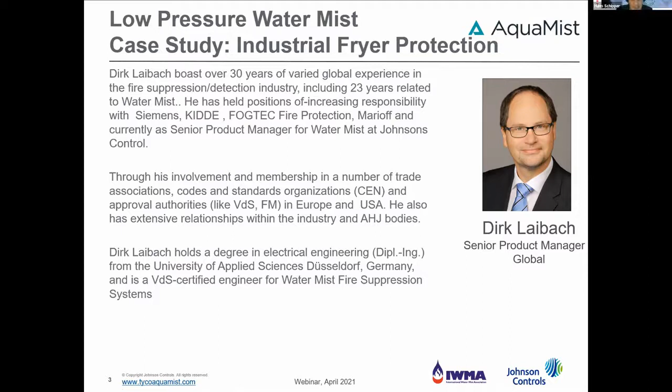This afternoon's introduction is to low pressure water mist systems for industrial fire protection. Here's an overview of the topics I would like to discuss during this presentation.

First of all, I would guide you through some key notes of the typical characteristics of low pressure water mist systems as they are for these specific applications, open deluge systems. Next, we'll go through the typical highlights of what a fryer is, what elements these fryers contain, and what specific parts we are protecting on these industrial fryers.

I will guide you through the typical approval testing program as we have done according to the FM 5560 fire test protocol, and I will take you into a specific project application which we have done with one of our partners in industrial fire protection projects.

Also, we'll highlight the system approved components. As already mentioned, the basis is NFPA 750 for all these water mist systems, but they refer to approved or listed components used in your specific projects or systems protecting, in this situation, industrial fryers with water mist systems.

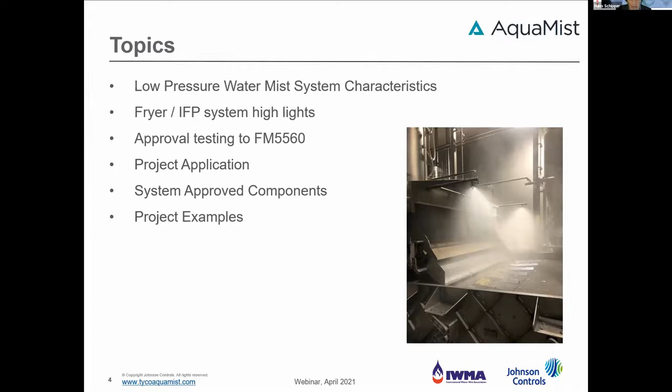Next, I will show you a bit of progress we made on a couple of projects, some site pictures of the actual fryers. The picture you can see here is the first one I want to show you, basically a takeout area. I'll move to the next slide where I'll explain a bit about the characteristics of these low pressure water mist systems, specifically for industrial fire protection systems.

The objective for these systems is typically the extinguishment of fires. As mentioned before, these are all open deluge systems, specifically for class K fires, the so-called cooking oils as defined in NFPA 750. One objective is flame cooling and oxygen displacement in order to extinguish the fire, as well as radiant heat blocking in order to cool down the periphery of the fryer itself.

All these systems are based on fire testing to FM 5560 and can be found in detail in our DIOM, the DIOM TFP 2240, specifically for industrial fryers.

The nozzle is actually the main part of these systems, a specifically developed nozzle we call the AM31, which has a minimum design pressure of 11.7 bar, resulting in a flow of roughly 14 liters per minute per nozzle. The overall average system demand flow for typical fryers, as we've seen in real life, is somewhere between 200 and 600 liters per minute as a total system demand flow.

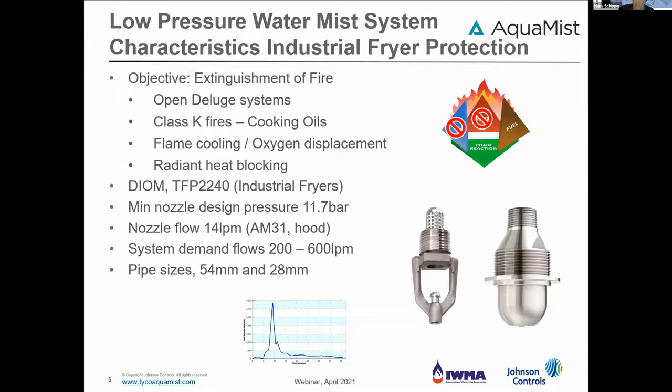Next, I'd like to give you a bit more idea of what an open deluge system is, and what 14 liters per minute looks like. It's based on fire testing to FM 5560. We at Johnson Controls developed a specific nozzle, as you can see here on the top right, with a unique spray pattern. I want to show you the discharge of these nozzles.

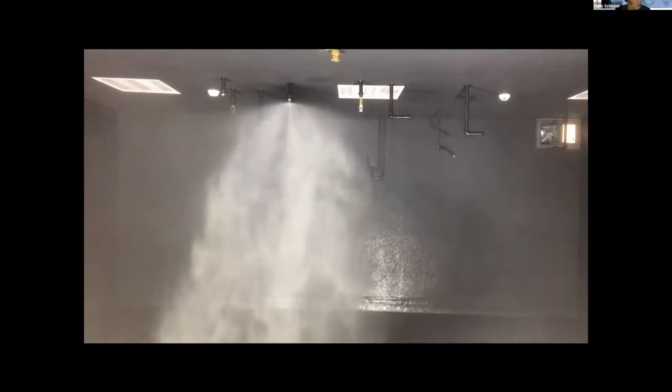So this is really 14 liters per minute with an average droplet size of 150 to 200 microns.

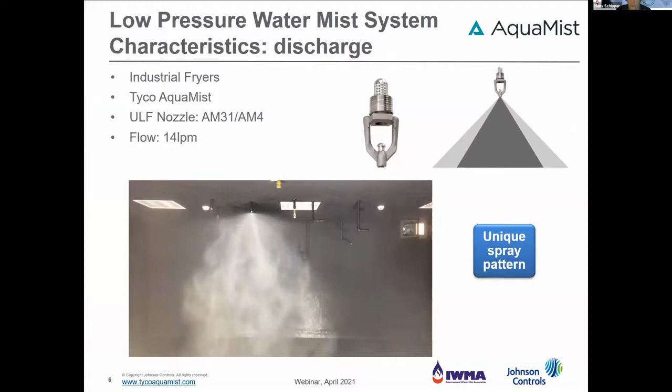Moving on, so what is an actual industrial fryer? I want to highlight a couple of main areas that we are protecting with our AquaMist ULF systems. These industrial fryers are mainly large cookers of food products installed in industrial environments.

For all these fryers, oils are mostly used as the cooking medium, and you can have oil fryers up to 19,000 liters of oil in the actual pan. The 4 main areas we typically see in those cookers are the primary cooking area, a takeout area, a fines box, and exhaust stacks.

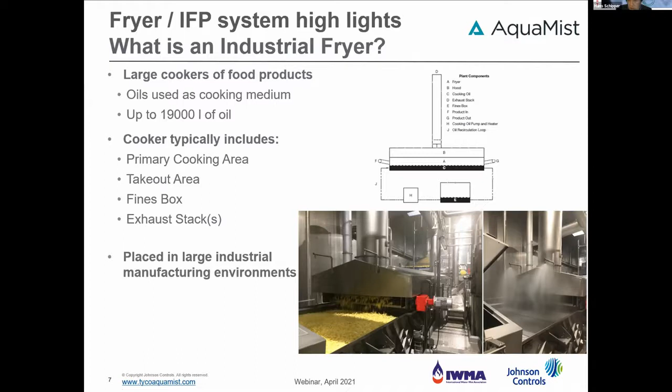On the next slide, I will highlight where we find these main 4 areas to protect. The primary cooking area is actually the area where you will have your oil pan with the oil level as well as the hood. This is the primary cooking area as described in the FM 5560 test protocol.

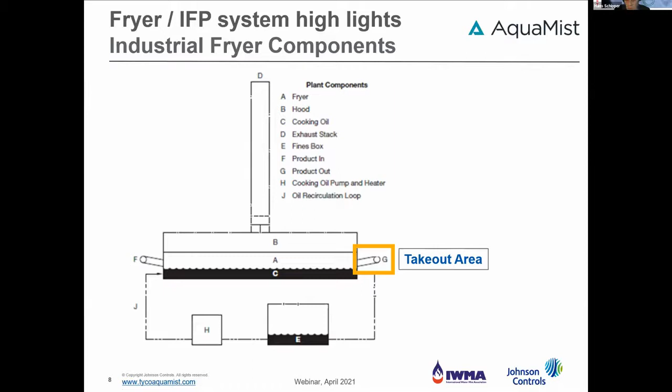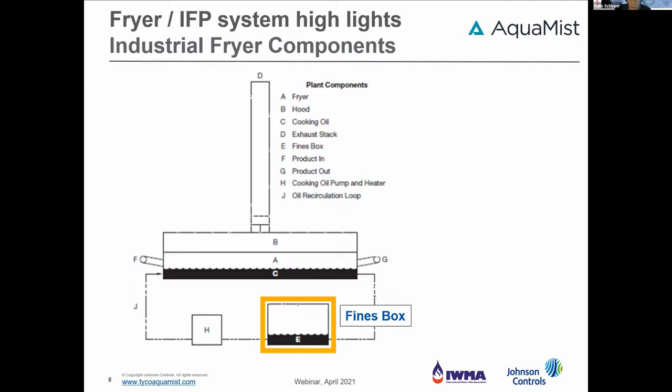Next of the main areas that need protection is the take-out area, that's where the product comes out of the oil cooker. A fines box, more or less, is the oil filter used to filter your oil through the cooking process. Lastly, we have the exhaust stacks, where you have the exhaust of your cooking vapors. Those are the main 4 areas that we can protect with our AquaMist ULF systems.

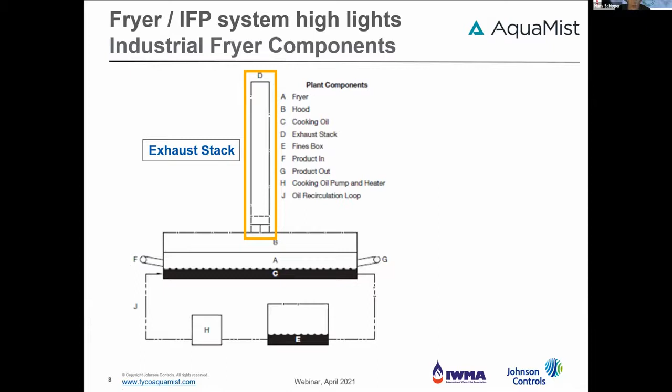Going into the actual fire testing to FM 5560, these tests are done to Appendix J, fire tests for water mist systems for the protection of industrial oil cookers. To give a quick overview of the tests, based on the actual test protocol, it is the idea to have 3 different mockups.

Mock-up A is a large pan of 2.4 by 2.4 meters as a mock-up for an oil fryer. Mock-up B is a pan 2.4 meters wide and 4.8 meters long, and mock-up C is 2.4 meters by 7.2 meters long.

These three different mock-ups you have to do the actual fire tests on, but in total a series of 6 fire tests has to be done, meaning each mock-up has to be tested in a situation with the hood position up as well as the hood position down. So for all 3 mock-ups, tests have to be done for a hood up position as well as for a hood down position.

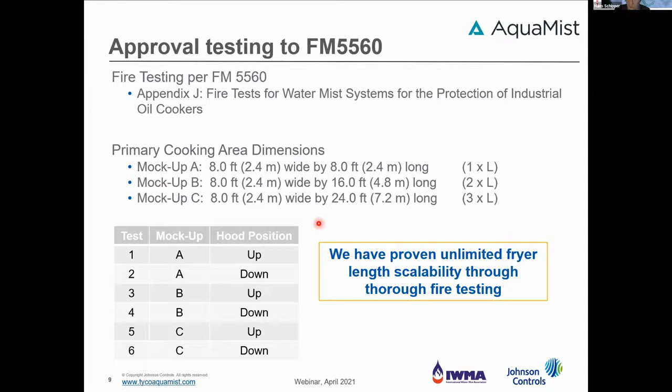A couple of fire test approval criteria as written down in the FM 5560 test protocol: all these tests are based on auto ignition temperatures of the oil. Fires inside the cooker mock-up should be extinguished regardless of the position of the hood, in the up position or in the down position.

Next of the fire test approval criteria is the need to extinguish all open flames within 1 minute after a system discharge. One of the other criteria is that it's not only extinguishing these fires, but you also have to prove that you can cool down the oil temperatures within 2 minutes below its oil flash point.

As already mentioned before, duration shall be a minimum of 10 minutes, and at the end you should really be able to extinguish fires and have no excessive fire flare-ups or micro explosions after a while.

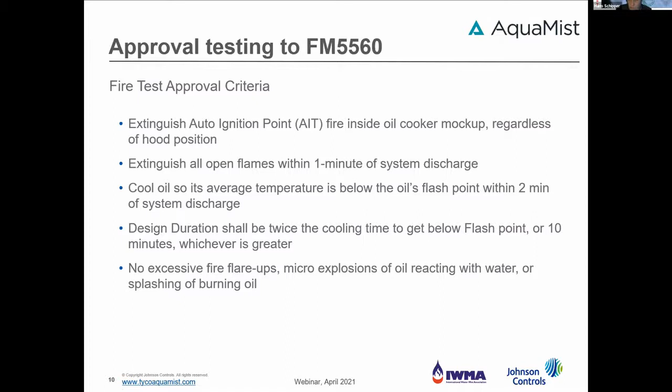Based on the FM 5560 test protocol, we have done more than 50 full-scale fire tests at our test facility in the US, where we have had 14 tests witnessed by FM Global.

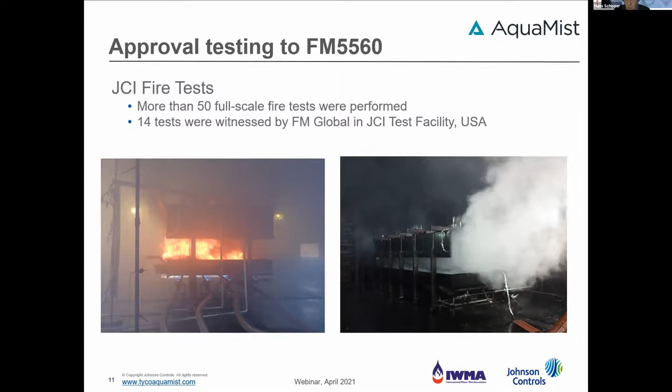So, to give a short overview, what is actually done during tests? Just to give you an overview of an actual test we have done, so what you see here - and I will show this movie twice.

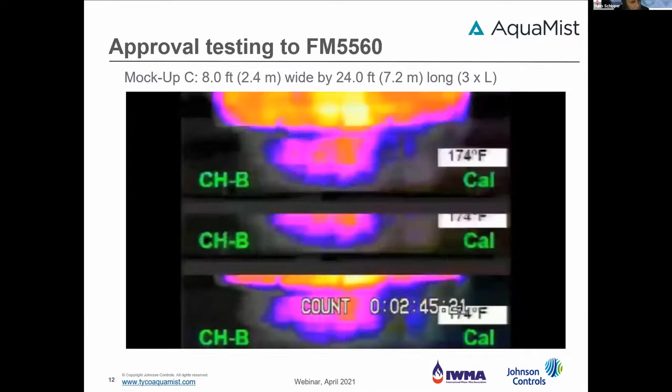What you see, all orange and red, are high temperatures in order to extinguish the flames and to cool down the actual temperatures.

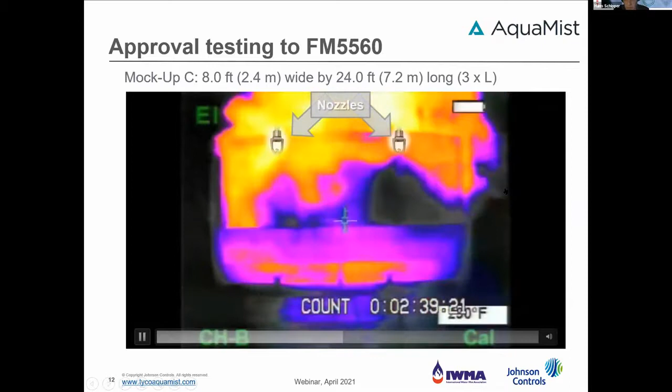The setup was the mock-up with 2 nozzles, so 2 rows of nozzles with a pre-burn time of 30 seconds, discharging water and extinguishing the fire within 10-20 seconds. It's important to have an even longer discharge time in order to cool down the oil temperatures below its flash point, as well as the fryer itself, so the complete fryer will be cooled down.

Additionally, I would point out that you can see in this heat radiation picture very well the temperature of the water, which is black - about 20 degrees. And already within this 1 minute, the fire has been extinguished.

Nearly the whole surrounding of that fryer, meaning the metal, has been cooled down very effectively in only 1 minute. What you mainly see is the heat remaining in the oil, which is the yellow shadowed part of that photo or film. That's really amazing what water mist can take out and cool down in this surrounding. You can achieve tremendous cooling capabilities using water mist.

Which again is amazing—you can see the water does not really impinge below the oil surface. Normally, when you pour a glass of water into oil, it will explode. But due to the fine droplets, evaporation in the oil does not take place, as the small droplets remain on the surface and do not dig into the oil itself. So this explosion will not take place with water mist.

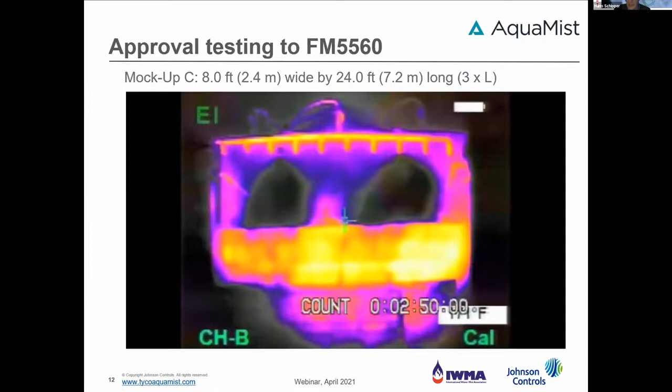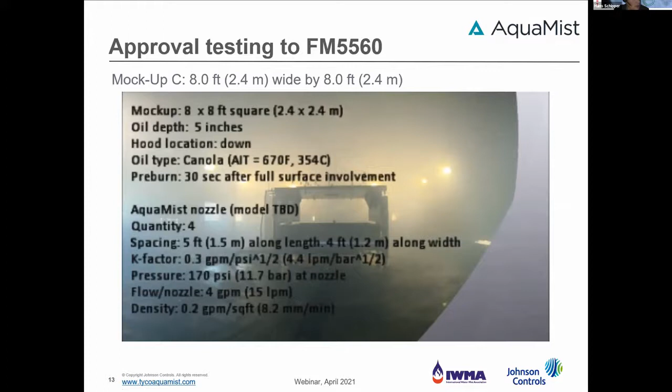So the next slide, I would like to show you how these tests actually proceeded. This is also a fryer up to 2.4 meters wide with 2 rows of nozzles—this is the smaller one, so in total 4 nozzles. That's roughly 50 to 60 liters per minute total.

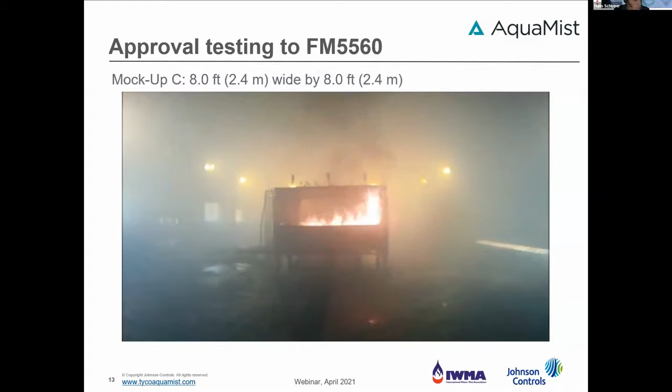Here you see the actual heaters, and now already some flames come up. The auto ignition temperature of the oil is reached already, and flames will be detected due to heat detectors. There is a pre-burn time of 30 seconds before discharge. So pretty big flames already coming up.

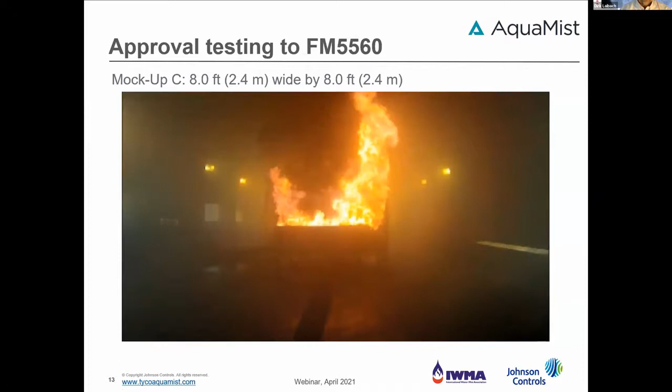We need to point out this pre-burn time, which is given by FM 5560. It should bring the system onto a very safe side, because in the real world the heat detector has already detected the relevant heat level quite a long time before, meaning in a real life case the water mist system has been activated far before the 30 seconds. And what you see after discharge, really 10 to 20 seconds, the fire is extinguished, and overall what you see is just water vapor.

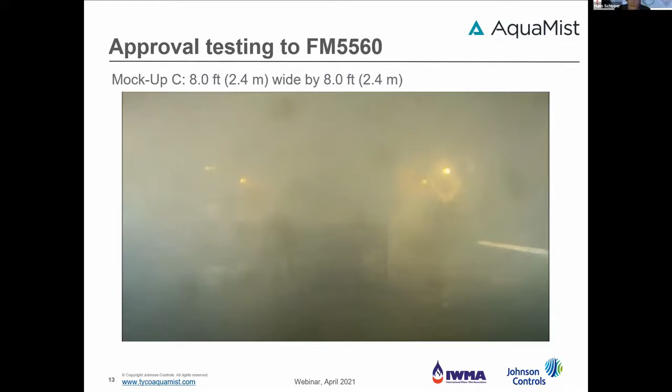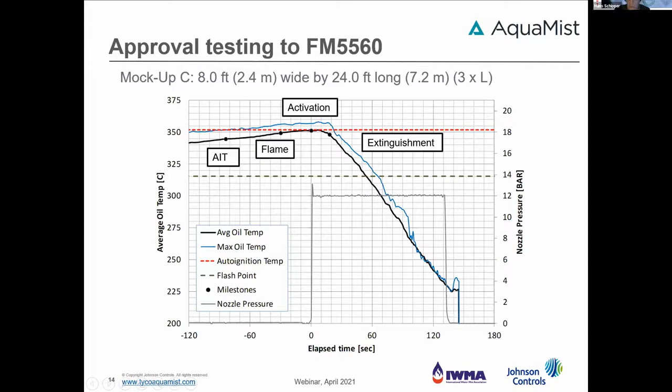This was designed and installed with a total of 26 nozzles, 2 rows of nozzles installed under the hood in your primary cooking area. These systems were designed with 2 zones per fryer: Zone 1 is the fryer itself with stacks as well as the exhaust and the takeout area, and a separate zone for the filter.

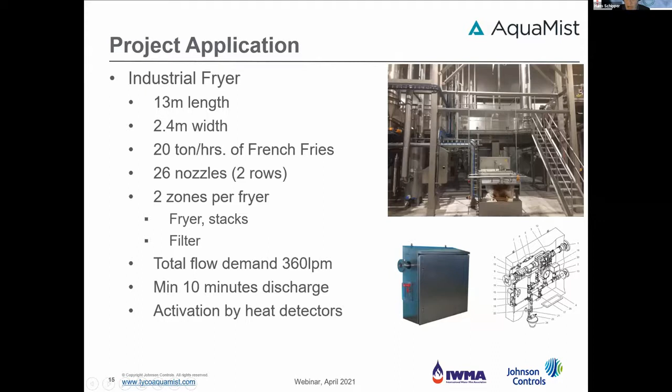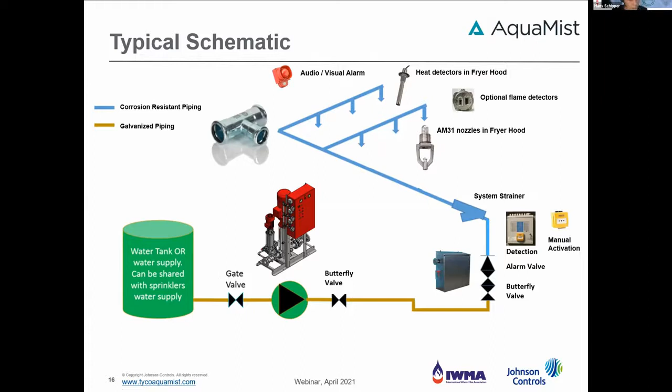As mentioned before, and as also mentioned by the previous speakers, it's all about a tested and approved system, but also about tested and approved components. The FM5560 protocol is not only about fire testing, but it's also about component testing.

So here's an overview of the main components used in these industrial fire protection systems: a pump unit, the approved nozzles, the piping system - the G-press stainless steel non-corrosion or corrosion-resistant piping systems - alarm valves, and the nozzles. These do hold a third-party approval, minimum the FM approval, but most of these components do hold UL listing and VdS approval as well.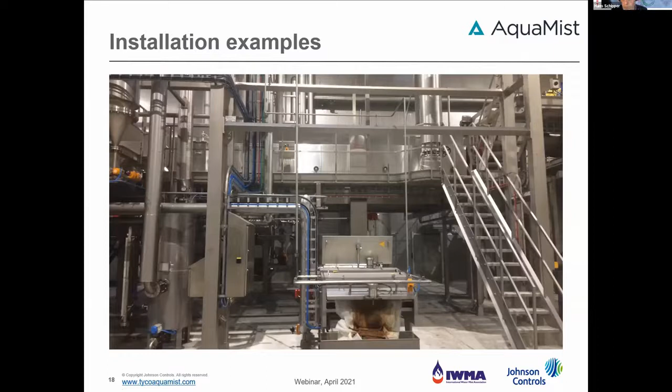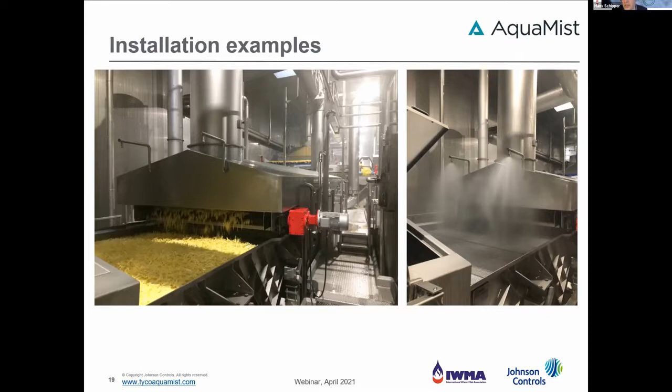So this is, as mentioned before, the take-out area, where the product, the fried French fries, come out of the industrial oil cooker, and there is additional protection required. Here you see a test during commissioning with actual fries, and here you see a cold discharge test of this installation.

In order to give you more detail on how these nozzles will discharge, here's another short movie. This is a cold discharge test during commissioning, just to give you a good overview - roughly 14 liters per minute per nozzle.

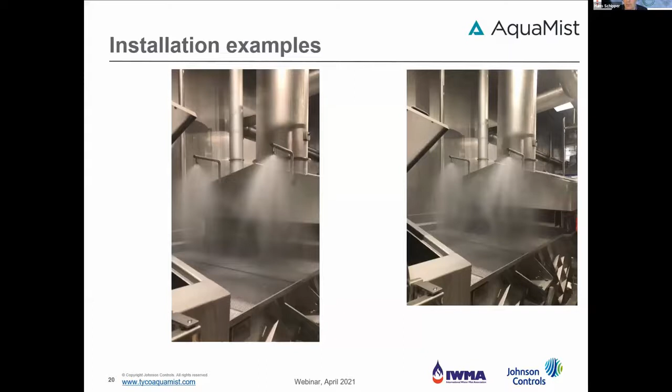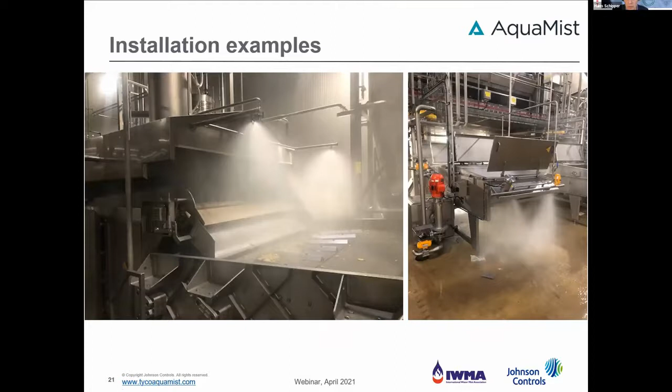Next slide. Again, here's a picture of the takeout area of one of the fryers. And here you see a cold discharge test for one of the filters, which I'll show you in a movie as well, to give you a good idea what these low pressure nozzles discharge - you can see 13, 14 liters per minute.

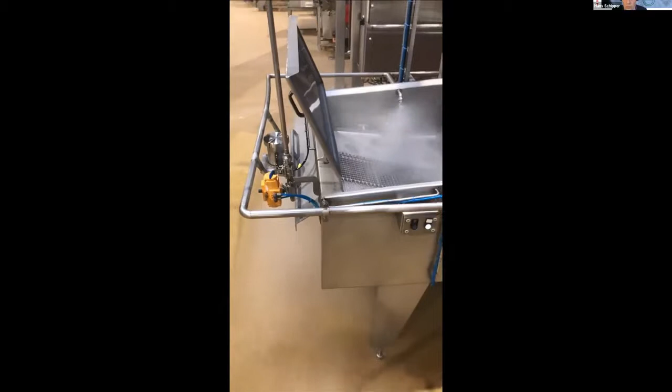Next slide. As I mentioned before, during testing you have to test with the hood up and the hood down. These fryers all have movable hoods, basically for maintenance reasons. But as you can see here on the left picture, you have your water inlet connected with a flexible hose, and you can imagine if the hood goes up and down, you have to have a flexible connection for your water supply.

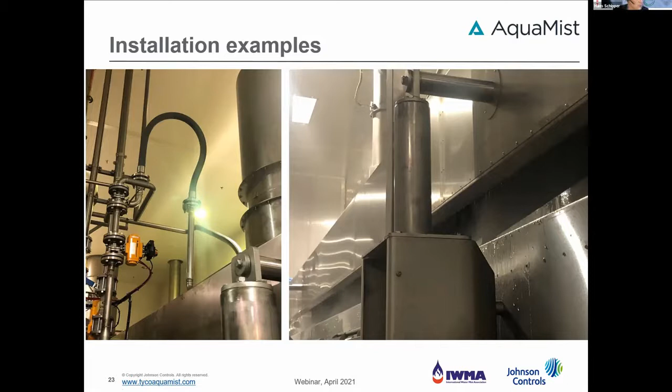One picture showing a total overview of one of the projects we've done - the so-called pump room. This is separated from the production area, where you have your water tank based on a minimum of 10 minutes discharge. In this project, we had two production lines, so 2 pump units and 2 valve stations per fryer line - 1 for zone 1, the actual fryer, and 1 for zone 2, the filters. That was all duplicated due to the reason that they had 2 separate production lines.

So one addition - Hans, maybe you can go back one slide. I think it's major important, as here, although this is a low pressure system, we do also like the high pressure or hybrid system. The piping is stainless steel, as you can see in that photo. And this is one of our key things we should point out with water mist systems in general - this is a long life technology.

Manufacturers and players in that field having approvals, as Mark mentioned already, use stainless steel piping, which is really a benefit for the customer, as this is a really long-lasting installation.

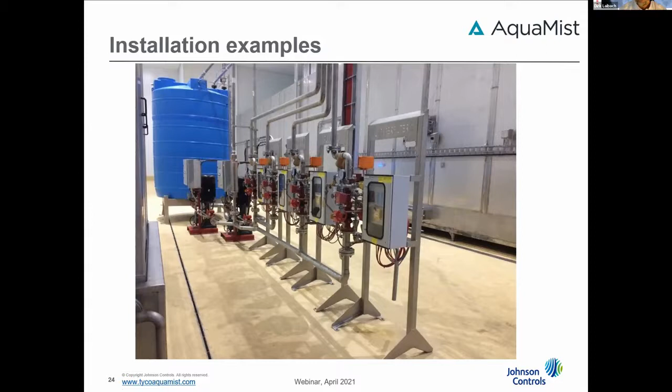So I just want to highlight that we discussed centrifugal pump units, but for these systems there is also an option for standalone systems in situations where power supply is not that reliable, and there a standalone system with nitrogen cylinders and a water tank can be an option for the smaller fryers as well.

That's quite similar to Anne's presentation for the cylinder system used for machinery spaces. It's more or less the same methodology. You have water cylinders or a water tank and a propellant, which Anne explained well, which pushes out the water to the nozzles. The difference is that water is not stored in high pressure cylinders, it can be stored in a low pressure tank. The difference is just the size and type of water storage, not more, not less. The principle of storing water for these standalone systems is exactly the same with high or low pressure systems.

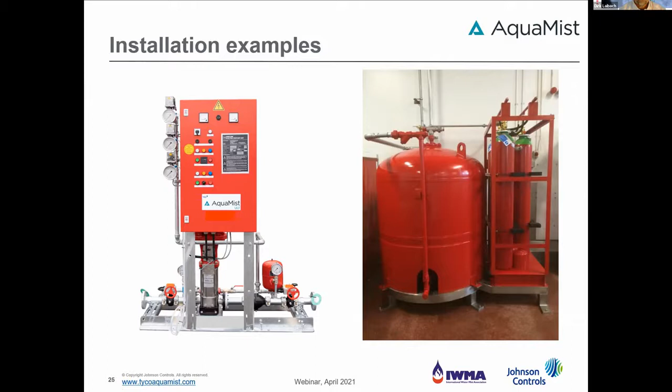So wrapping up, we can say that these low pressure water mist systems are FM approved for protecting and even extinguishing fires in industrial deep fat fryers, but it's not limited to only one fryer, so we can deal with a couple of deep fat fryers in a single facility. These are all large scale industrial fryers up to 2.4 meters wide with unlimited length, and it's not only protection of the primary cooking area, but also protection for the takeout areas, exhaust stacks, fines box or filter units, and possibly any other components that need additional protection.

As mentioned before, we can protect an unlimited number of oil fryers or oil cookers with a single water supply. In practice you have one single water supply with a pump unit. You calculate the hydraulic calculations based on the largest fryer or largest hazard, and based upon that you can select a pump unit and water supply to protect several fryers within your system. We've done projects with one single water supply, one single pump unit, protecting up to 18 fryers.